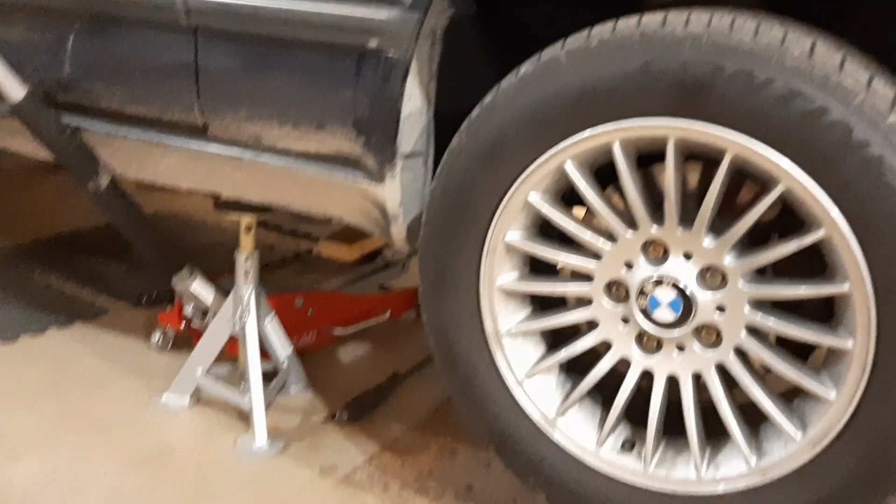I want to tackle the drive shaft because when I drive the car, I noticed if I'm just driving around and then I let go of the gas pedal, I hear a big thumping sound around the drive shaft tunnel area here. I suspect the drive shaft center bearing because it's old, like everything else, and there's a rubber

bushing inside of it. I really hope it's not the actual joints of the drive shaft because in case you don't know, the joints are staked on the E32 and also E34 and maybe other BMWs, and they can't be replaced. So you have to change the whole drive shaft, and it's $1,400 Canadian for a new drive shaft. So yeah, really expensive. If I need to work on it, I might get it rebuilt. I'll see, but we'll cross that bridge when we get there, as they say.

So yeah, I thought might as well record it. Maybe it helps others, entertains some people, laugh at my amateur mistakes. But I'm sure some of you can relate to the mistakes I make sometimes.

Anyway, so let's get under the car. I already jacked the car. I'm at the second level here with my ESCO jack stands. And yeah, I got the exhaust lowered. At the back, it's almost touching the ground.

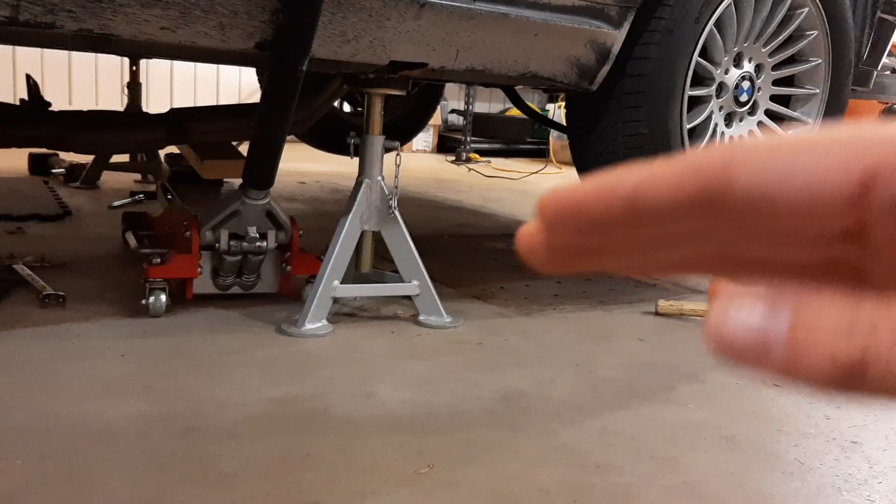And I elected to leave it in place because I can't quite get it past the subframe, I think it was, or the cross member. It's really annoying without a lift, so I'm just leaving it there, and I think I'll have enough space to do the work. So yeah, let's get under the car.

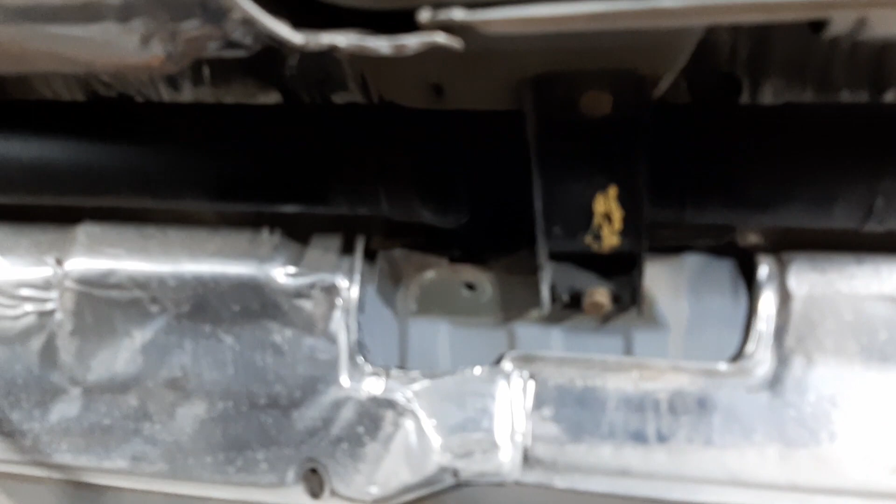All right, so I hope the video quality will be better. I decided to record everything with my phone because the camcorder is difficult to set up anyway. So this is my drive shaft. Let's just focus here. Yeah, no signs of damage or anything, but I still need to check for the clunking sound.

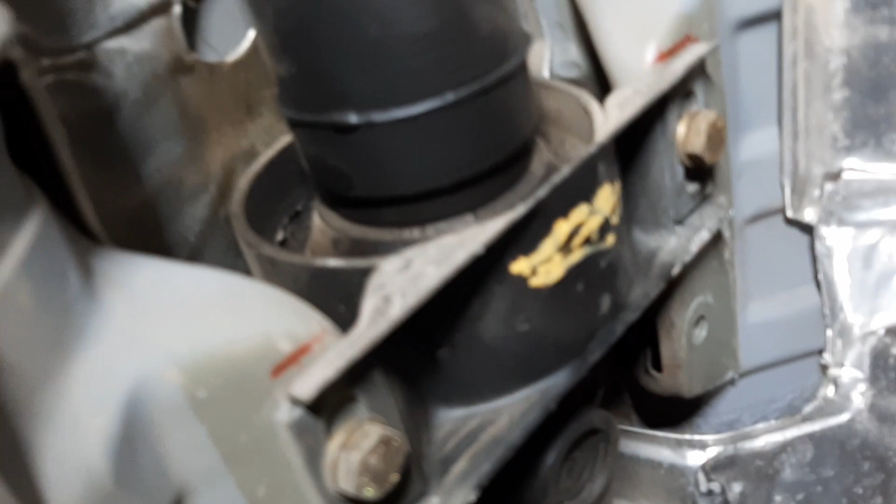So I bring my light over here and then I try to rock it a bit with my hand. Yeah, that's the kind of clicking sound I was hearing in the car, but louder. I wonder if changing the engine mounts and the transmission mounts made this bushing wear, because now at the front it's aligned correctly, but at the back here it's still drooping a bit, so that might accelerate the wear, and I think it's already pretty worn, and I don't think I should be able to move it that much.

Okay. But yeah, this clicking noise, I should not hear that. Maybe it's the shield here, but I don't think so. Okay, so I guess there's only one way to find out. I need to remove the drive shaft and inspect all the joints and the center bearing as well. So yeah, let's do that.

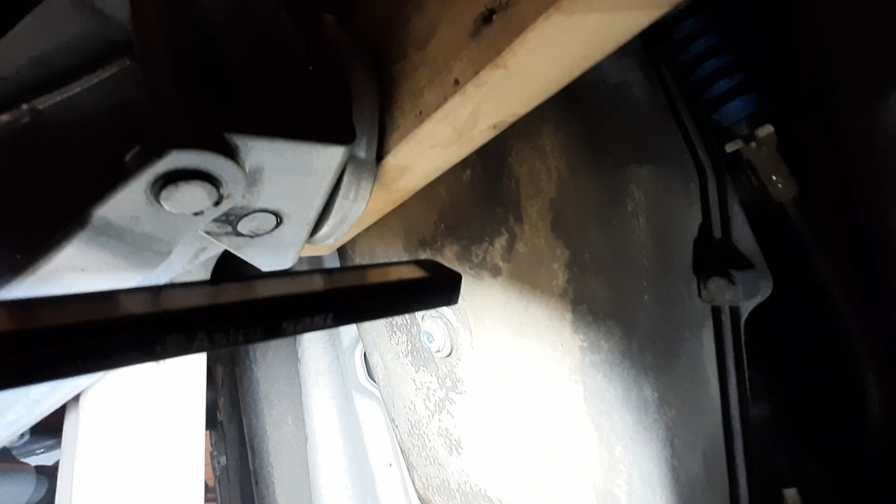The Bentley manual mentions a sleeve here that I need to unscrew, but I can't see a sleeve anywhere. Maybe it's for the manual transmission cars. I guess I'll just go to the next step then. Okay, so the transmission is supported, and I need to remove these 13mm bolts and nuts. Now, of course, I'm using my trusty Milwaukee impact. So easy when you have the right tools, eh? Yeah.

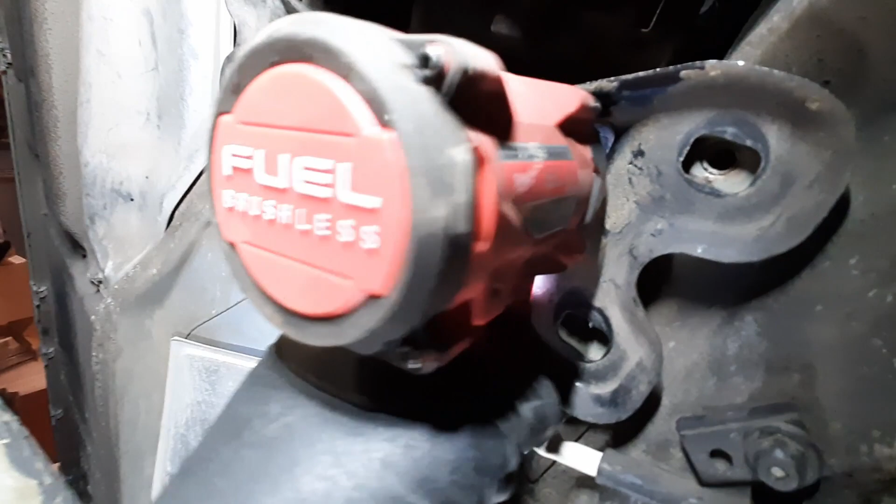All right. So it should drop right out. Yeah, there's a bit of tension here because the studs are not all aligned perfectly. So yeah, now I have full access.

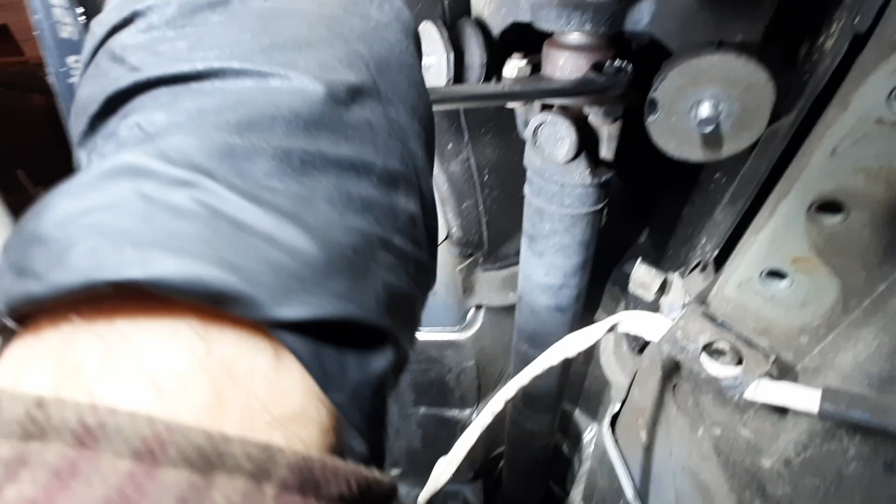Perfect. Okay, so I put the car in park with the parking brake activated, so the drive shaft shouldn't move all that much. So apparently these are very, very tight. Wow, it's tight. Yeah, very tight. I think I'll use a cheater bar for that. Okay, so my cheater bar is just too small to fit on my 17mm, so I'll just go with the good old dead blow hammer and see how it goes.

I think I got it. All right. Perfect. Yeah, these are self-locking nuts. You need to replace them. You can't reuse them.

And yes, I need to get ratcheting wrenches. They're on the list. But I want to get a set from Gray Tools in Canada, and they are close to $300 for a set. So I need to budget accordingly and buy them in the future, not now.

Okay, need to get the car out of park and parking brake. Okay, where's the other nut? There it is. All right, so that's all 4 nuts removed.

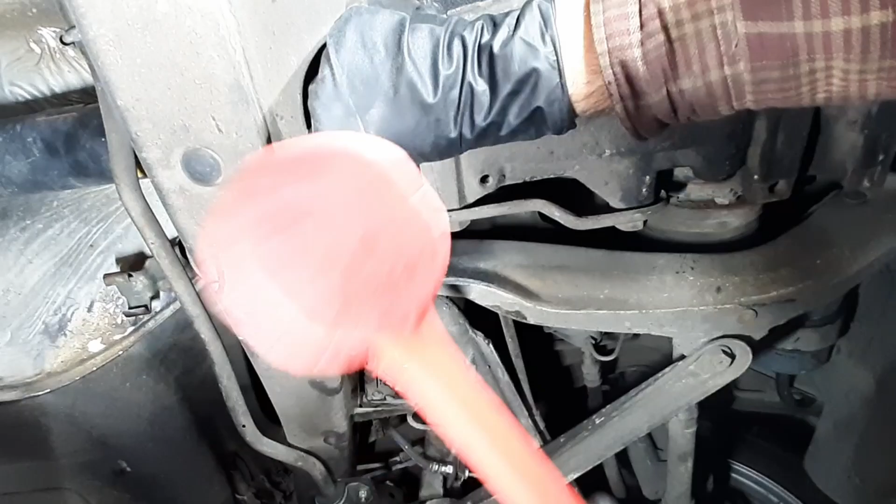So you can tell these are locking nuts because they are deformed and they don't back out easily. They offer quite a lot of resistance because of the shape of the nut and how it fights against the threads. Okay, I need to rotate the drive shaft now. Alright, so that's all the nuts at the diff removed.

Okay, now that the front and back bolts of the drive shaft are removed, I can remove the center support bearing, which is just held with these two 13mm bolts. Okay, I'm not sure how heavy the drive shaft is. The Bentley manual says to support it. I don't have any device to support it, so I'll have to manage to do it on my own.

All right, that's the last bolt. Okay, so yeah, it's somewhat heavy, but not too bad. That doesn't sound very good. Anyway, now I guess I need to find a way to undo it. This part is rarely shown in videos because I guess it's too cumbersome to record because of how long and heavy it is. Well, okay. I guess I'll just get some blocks of wood and support it.

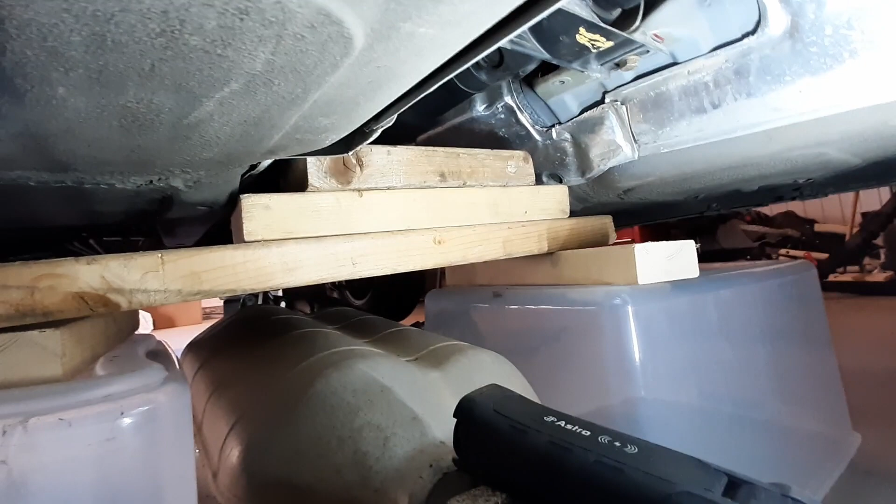All right, so I built myself a fantastic custom drive shaft support tool using quality plastic and fine wood, and it's fully adjustable too. You can slide it back and forth and so on. Very quality tool, and made in the USA, of course.

But anyway, that'll do. I just need something to support it, because I don't want to leave it hanging there, and I'm not quite sure how heavy it is yet. So yeah, I'll just hold it on these blocks, and then I can work at the flanges. All right, good stuff. I got the drive shaft lower a bit. Let's see if I can move it. Okay, so it looks like the bolts are binding slightly. Okay, yeah, nice. It's free.

Okay, how do I get it through there? Maybe I need to move it out of the way like this. All right. Okay, so you just need to pivot the joint either like this or the other way, just to get it past the flange here, this one. Okay, so that's good. This side is free. I can just leave it resting here like this.

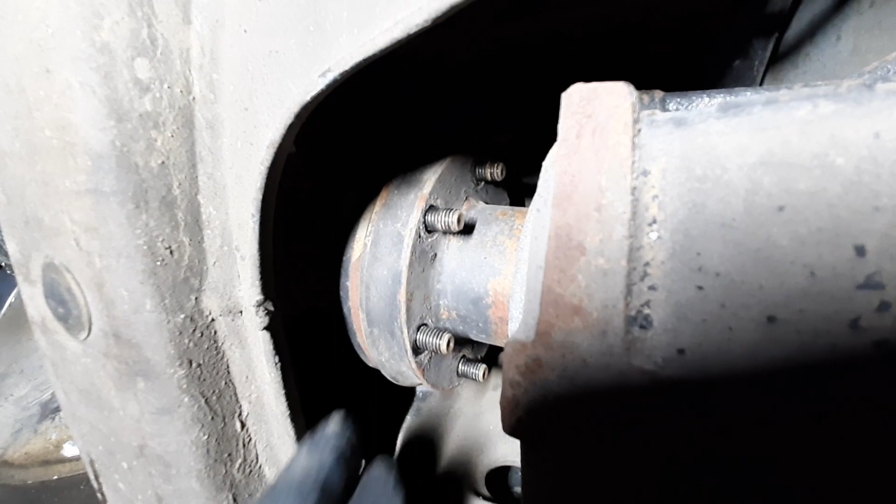Okay, I'm on the diff side, and I'll see if I can remove the drive shaft and leave it resting on the subframe here. So let's see how it goes. Oh, it slides really easily. Okay, I want to be gentle with it, and then just leave it resting here. All right, perfect. Okay, I guess I can remove my support now and then get the drive shaft out under the car.

Okay, I tried to give you a wide angle view. It's difficult to capture the entire length of the drive shaft. Anyway, so I can remove these blocks. Okay, and I'll try to pull it at the back. Slide it over the sway bar, like so. All right, so this is, oops. No worries, it just fell on the plastic box. Oh, yeah, it's pretty heavy. Okay.

All right. There you go. Drive shaft out of the car. Not the most graceful thing ever, but you know, working on the cold winter floor and getting a drive shaft out is never going to be fun nor graceful, but anyway, I still got the job done, so that's what counts. So here's the drive shaft out of the car.

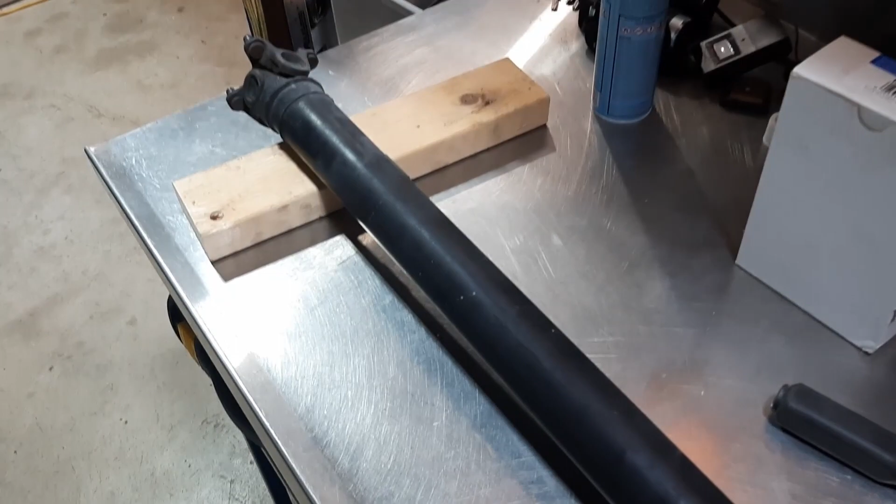I noticed that it says E32 on it there on the label, so it must be specific to the E32, so not interchangeable with the E34. And I also did a visual inspection, and from what I can see, all the little welded weights are all in place. There's one here, another one there. So you just want to make sure that they're all at the right place.

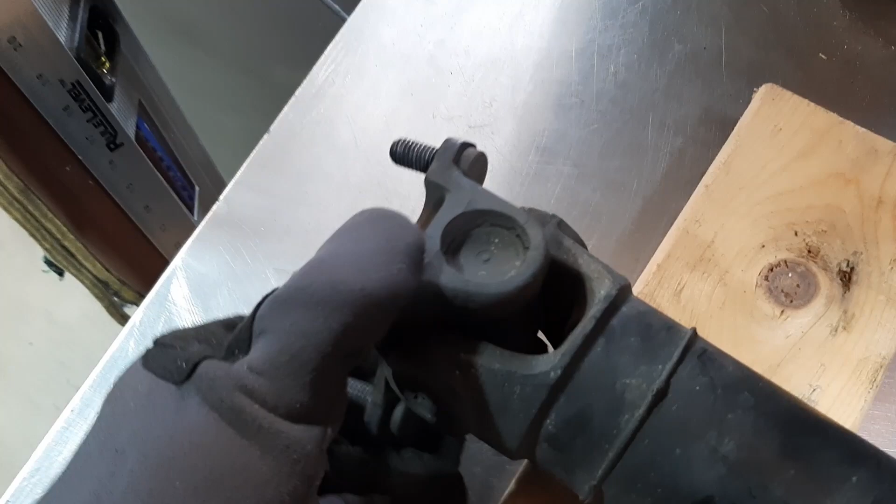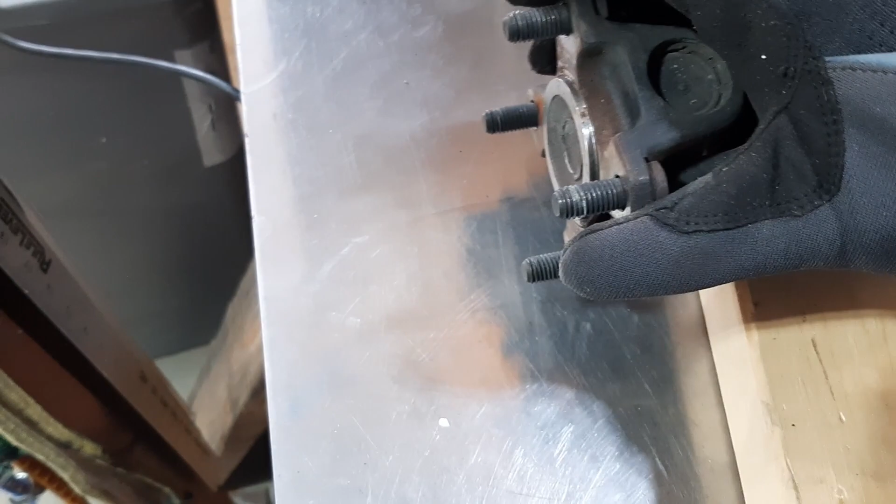I looked at the joints, and this one at the front of the car in particular is a bit notchy in all directions. So if I move it, yeah, it's a bit notchy in this direction and also this one. Hard to tell by video, but you can feel it in all directions. And I checked with the guys over at BMW Forums, and one member suggested that it's normal wear if it's in all directions. So nothing to worry about. I think it's just the age of the car.

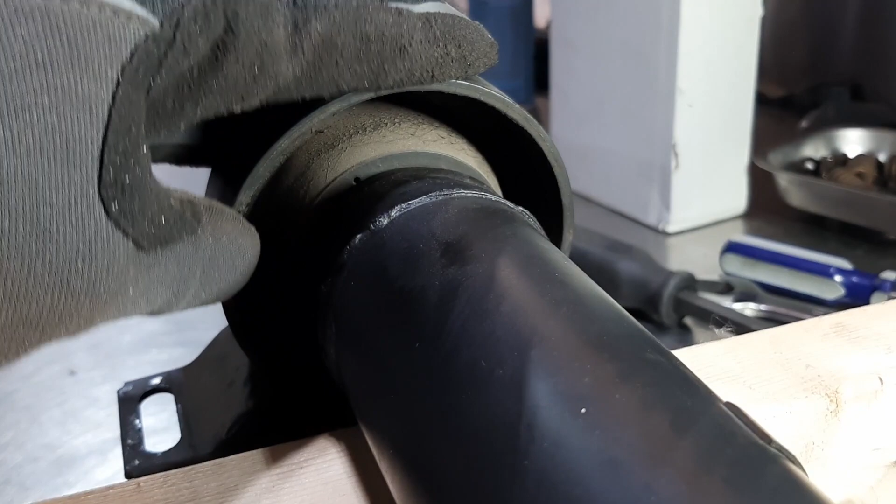And I did look, however, at the center bearing, and that's very interesting. So the center bearing needs to be replaced from what I can tell, because first of all, it's noisy. So the bearing is not good, and it's wobbly as well. So if I look at it from this view, you can see how it moves. It's eccentric. So that's no good. It means it will affect the balance, I believe, of the drive shafts. So that may be where my vibrations are coming from.

And yeah, it's noisy, and that's not normal. It shouldn't do that. And it's a bit loose. It's not broken entirely, but you can see the cracks there in the rubber. So it's definitely due for a replacement, and it's exactly what I have here. So I ordered an SKF replacement. Unfortunately, made in China, as you can see there. But you can't really control that.

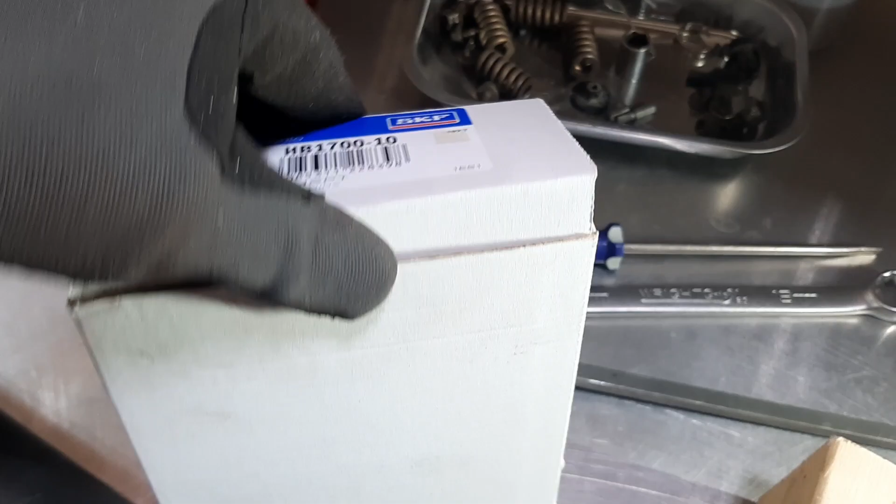So this is a new center bearing, and it's incredibly smooth when you just turn it. It's super tight and very smooth, and the rubber is nice and fresh, and it's a bit pliable, so exactly what you want, but not too much. So I think it will be a great replacement. And I wonder what these white marks are.

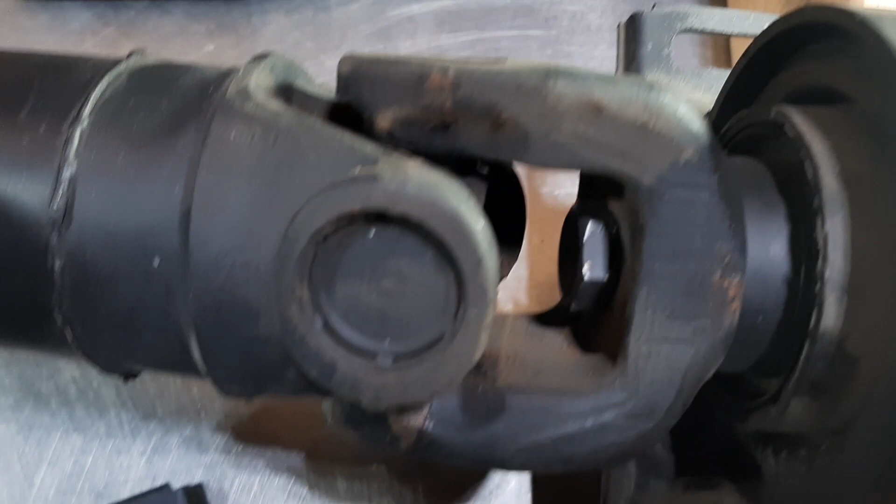Anyway, I just need to remove, I believe, this, where is it? Yeah, there's a bolt there. It's a 19 millimeter. So you remove that, and then you can separate the two halves of the drive shaft, and then you can remove the center bearing. And also, this joint is okay. I took a look, and it moves freely in all directions. So this one really did not see a lot of movement in its life, because it's very smooth in all directions.

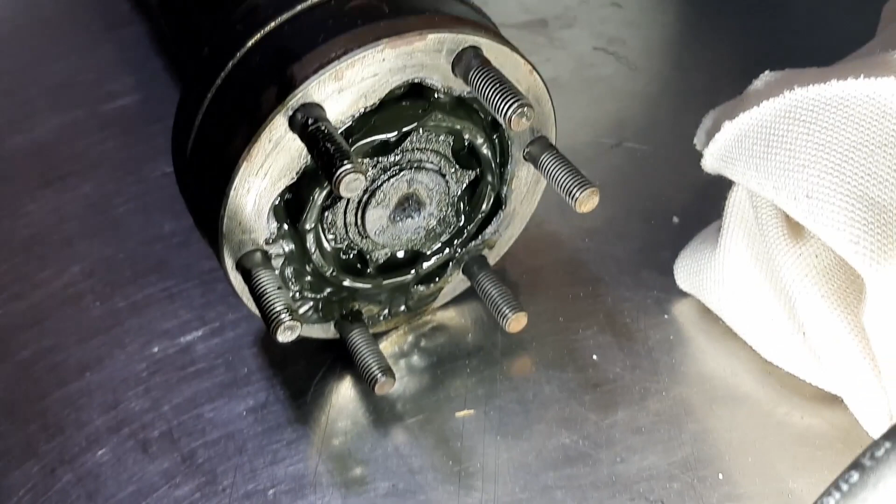And at the back there, let me just show you quickly. So you have grease there. There's a sort of bearing, and it was just packed with grease where it meets the differential. So that looks okay, I guess. I don't know what else to say. Seems fine. So I'll take these apart and then replace the center bearing.

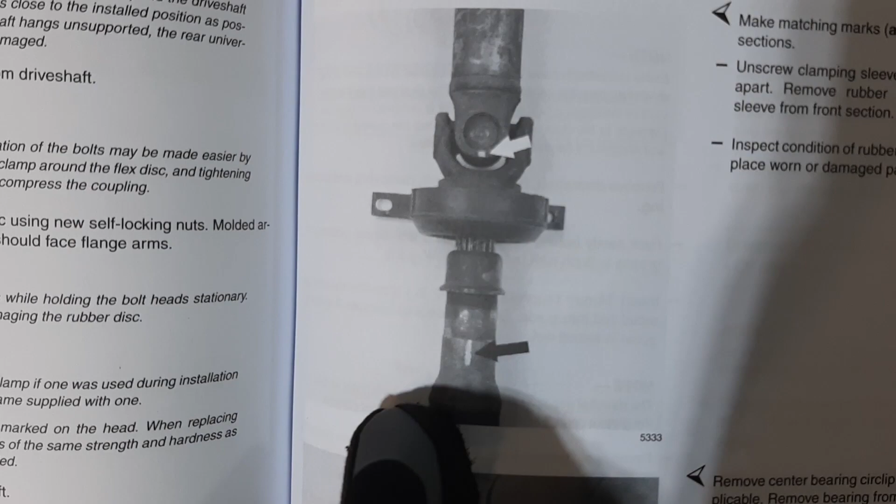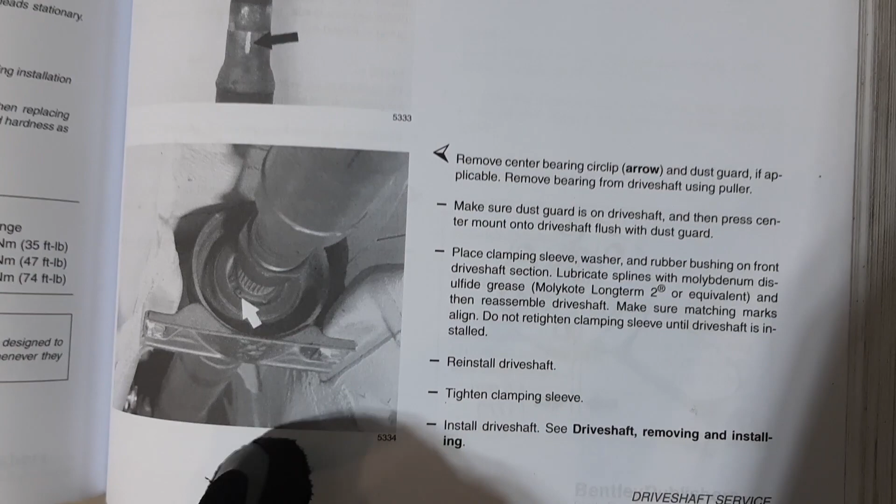Okay, so the Bentley manual says the same thing as everyone else online. You need to make paint marks so that the drive shaft is reinstalled with the correct alignment, because these two halves are balanced together. So it's really important. But the instructions are a bit unclear. It talks about a clamping sleeve, which I can't see on my car. It might be for manual transmission cars, I don't know. Then it says reinstall drive shaft, tighten clamping sleeve, install drive shaft. But isn't that the same thing as reinstall drive shaft? So what's going on here? Anyway, I think I'll just wing it, and let's see how it goes.

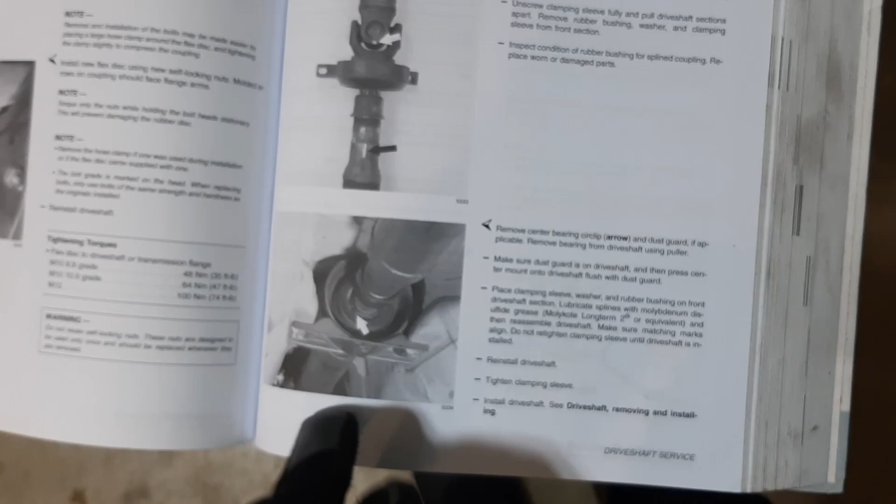So I made my paint mark using one of these Sharpie paint pens. Quite useful. Although you have to shake it really well when you're working in a 5 degree Celsius environment. But anyway, now I need to remove this bolt. I don't want it to turn, so I'll just counter hold it with a screwdriver. I think that should work.

Sorry for the shaky camera and the bad angle. I don't have a camera guy yet. Maybe when I reach 1 million subscribers, I'll take care of that.

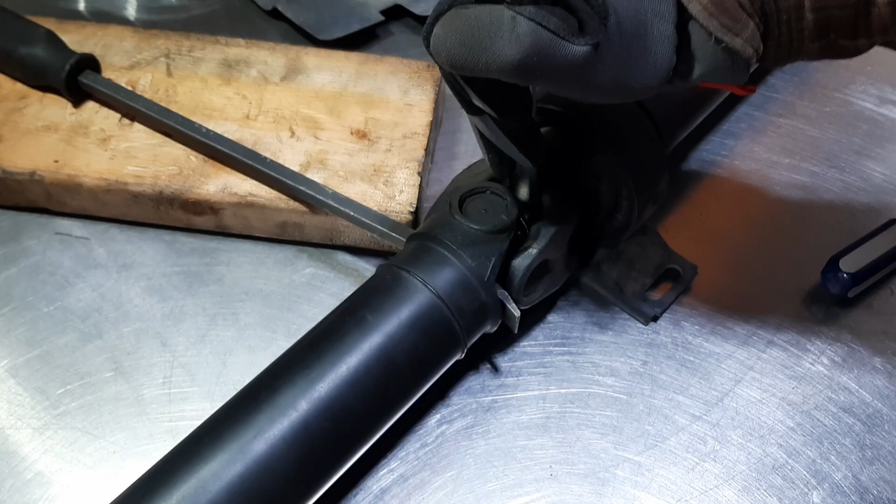Okay, and I don't think the bolt is reverse thread. I think it's a regular threaded bolt. So apparently these are quite tight. So let's see how it goes. Whoa, yeah, pretty tight. Okay, so I put a pry bar to hold the drive shaft in place, and I'll try to hit it with my hammer, because this bolt is really difficult to remove. So let's see how that goes. Wonder if that did it. Nope, still tight.

Wow, this thing is super tight. I cannot believe how difficult it is to remove it. Yeah, might have to find a different plan. So I'll try something else. If I bring it here and step on it, should be able to undo it, technically.

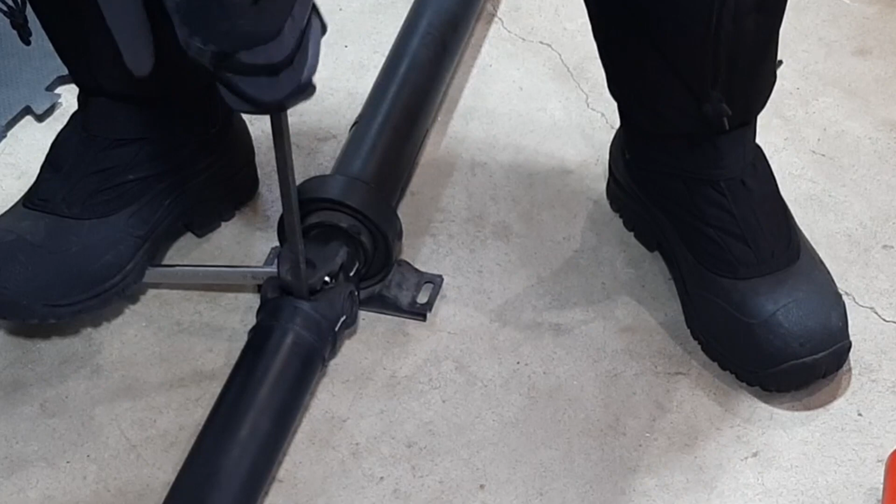Yeah, I believe that's the tightest bolt I've encountered on the car so far in my 3 years of ownership. Nothing compares to that one. So here's the result after hitting it a few times so far. It's barely backed out, and yeah, it's on there really tight.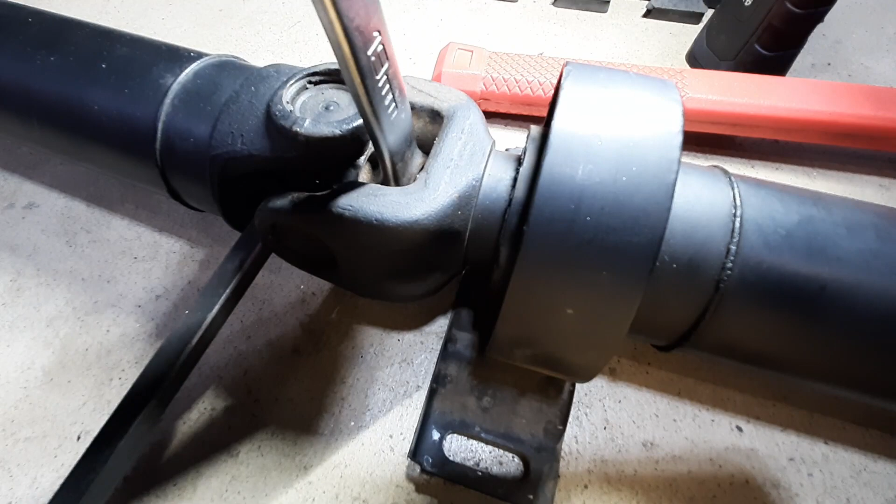Okay, I'm making good progress, except that now I don't have any room to remove my wrench if I continue, because the space at the back here is closing more and more. So I need to back out this part of the drive shaft this way, so that it rests against the bottom of the head of the bolt, and then it will give me more room at the back there for my wrench, and I can continue. Okay, let's try to back out the drive shaft a bit.

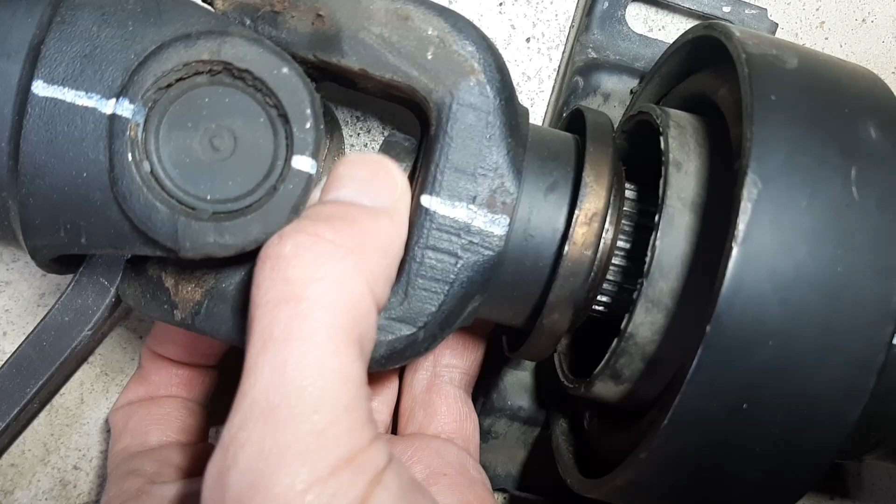Yeah, I think it's working. I'm closer to the bolt now. Okay, so it's coming along nicely. I did a few cycles of just turning the bolt, hitting it there, turning again, hitting it, so maybe like 3 times, 4 times, and it's starting to separate the splines now, and the bolt is quite loose, so I can finish it by hand. Yeah, perfect. So let me try to grab my hammer here for some live drive shaft separation.

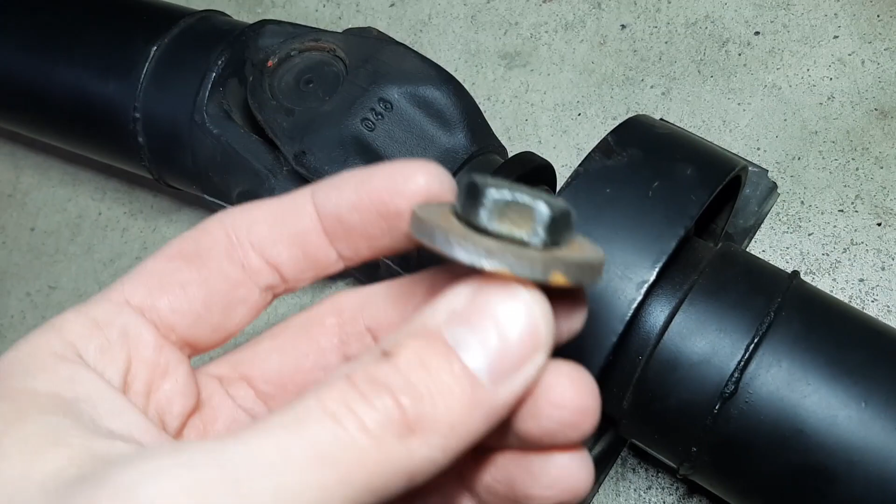Oh, there's the bolt. Finally, this is the one. So maybe they put some extreme Loctite on it from the factory, and there's a super mega washer. Wow, that's huge. It's an 8.8 bolt. There you go. Perfect. I wonder what this powder is. Is it metal shavings? I'm not sure. No, it looks just like dust or something.

Anyway, I don't see the sleeve that the Bentley manual was talking about. That metal part there is the inner race of the bearing, but there's no sleeve. So I'm not sure what they were talking about. All right, so by looking at the center bearing up close, you can see how worn the rubber is over here. It's crumbling when I rub it. So yeah, I'm glad to change it.

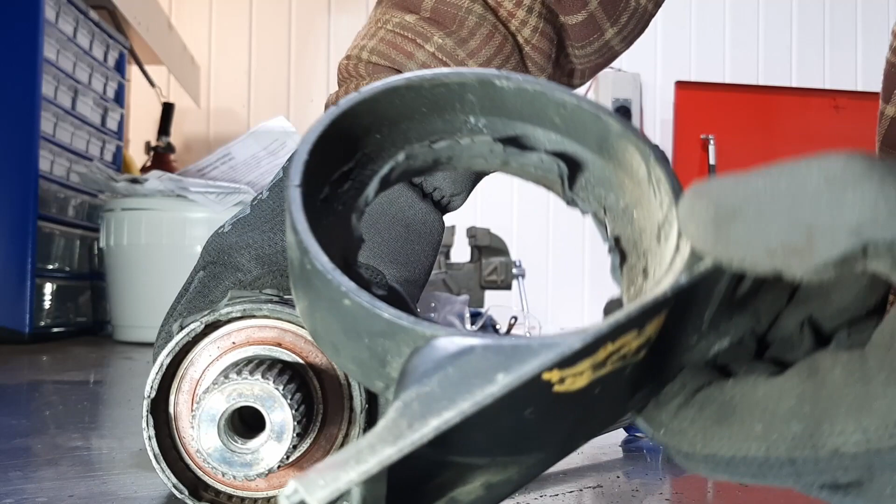I think I will cut the rubber all around to remove this outer sleeve, and then I can use a puller to remove the actual race of the bearing. So let's try that and see how it goes. All right, so this is the outer sleeve with the molded rubber, and I just cut around it, and I could remove it easily. Okay, then I just need to remove the actual bearing.

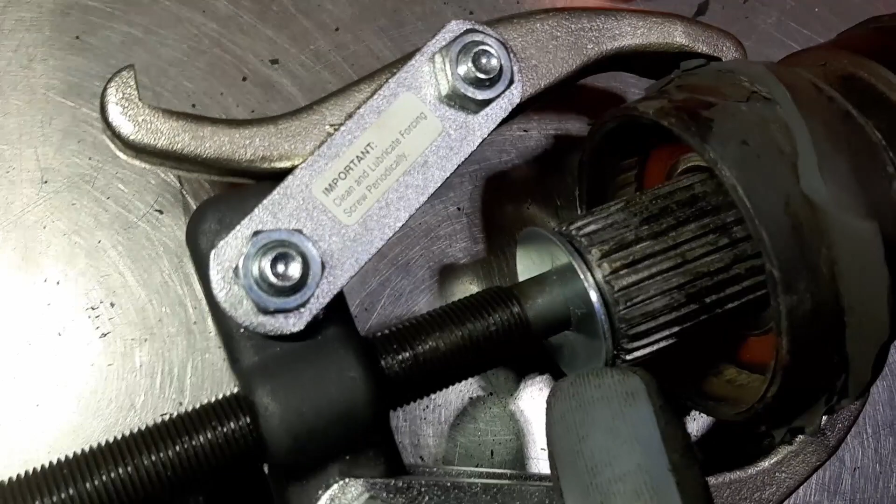Okay, so I'm using a small general purpose puller to remove the bearing. I figured that I would need such a tool because it's probably stuck there. I'm using 2 washers here to push on the splines, and then it should pull the bearing. And I already tried it, and I can see that it's separating. You just need to make sure that you are grabbing far enough on the rubber so it doesn't slip.

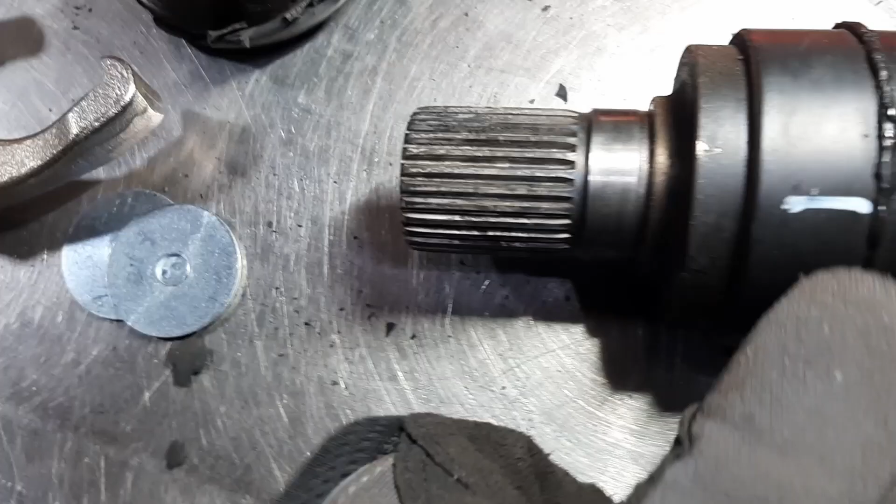Okay, so let's see. Okay, perfect. So that's the bearing removed. Okay, so this is the surface where the bearing sits. Looks nice. And the splines are in good condition as well.

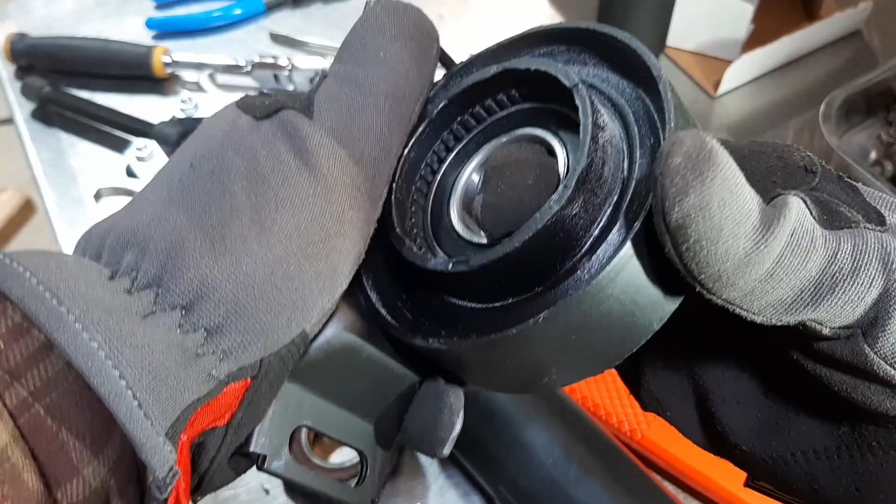So okay, good stuff. I inspected the bearing, and it's pretty smooth when I turn it, except that I can hear some clicking when I push on it. So yeah, if I try it with the new center bearing, it's perfectly solid and there's no movement and no play at all.

So when looking inside the threads here, I can see some residue. I'm not sure what it is. Maybe some old Loctite that BMW used in the 90s. I will use this bore cleaning extension on my drill to clean inside there, you know, just to make it nice and so there's no debris or anything like that.

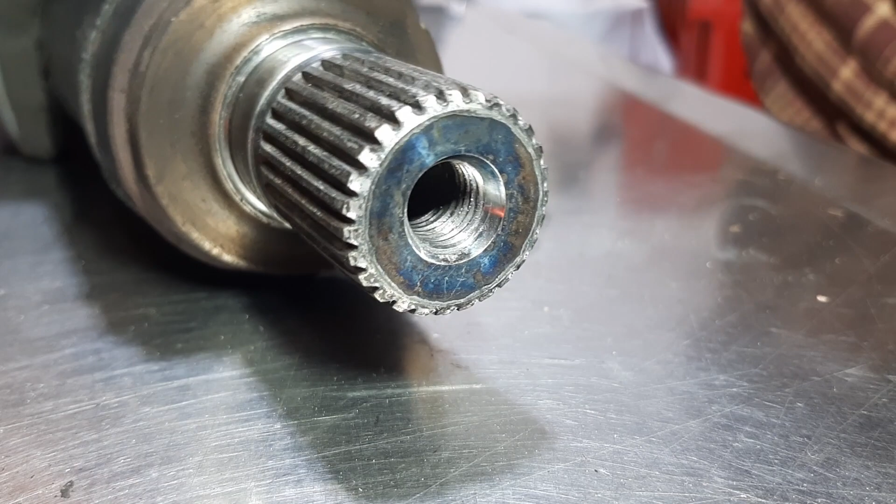All right. Okay, give it a bit of brake cleaner. And just clean it with a towel. It's probably overkill, but while I'm in there, I might as well make it clean so I know it's okay and there won't be any obstruction for the bolt. So yeah, okay, that's great. Looking nice and shiny. Ready to reinstall.

Okay, now for installing the center bearing. So the way it goes is that there's a deeper side here, and there's a shallow, almost flush side, and the flush side goes this way towards the drive shaft.

So when reinstalling bearings, normally from what I've seen on videos online and reading about it, you would use a cup of some kind to push on the inner race. So this is the metal part, and you don't want to push on the outside here or on the rubber or on the actual mount, you know, the outside casing. So you want to push on this, but the thing is, I don't have a suitable socket.

I have a 1-inch socket here, which kind of fits, but it won't slide over the spline, so that's no good. And I have a 36 millimeters here that would slide okay, but it doesn't really make a good contact with the inner race, you know, so that's not good.

But then I looked at the drive shaft. So this is the second half that pushes against the center bearing, and here, let me show you. Okay, so if we look at the shaft that would actually contact the bearing, you can see that if I slide it on there, the diameter is perfect.

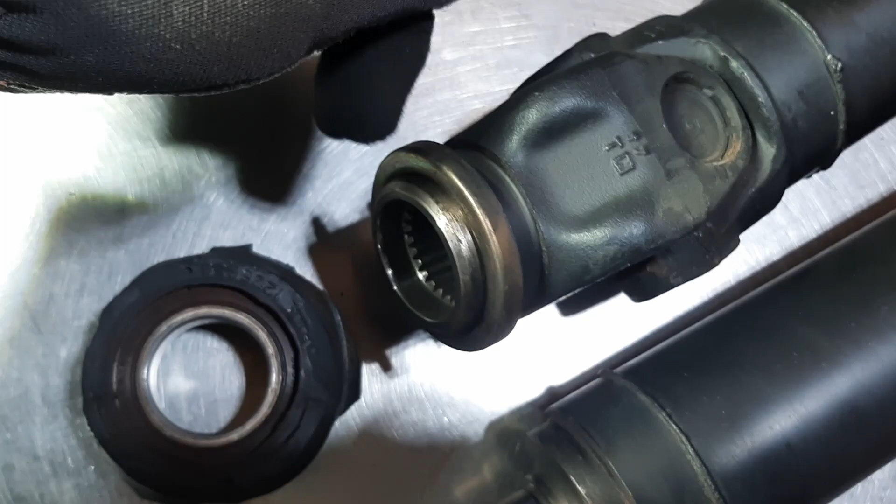Okay, so my theory is that I can actually use just this sort of surface area to push the bearing in place, and I don't need a cup or any special installation tool. I will just use the bolt to push it this way, to clamp it, and it should seat the bearing perfectly, just like this. So I will try that, and let's see how it goes.

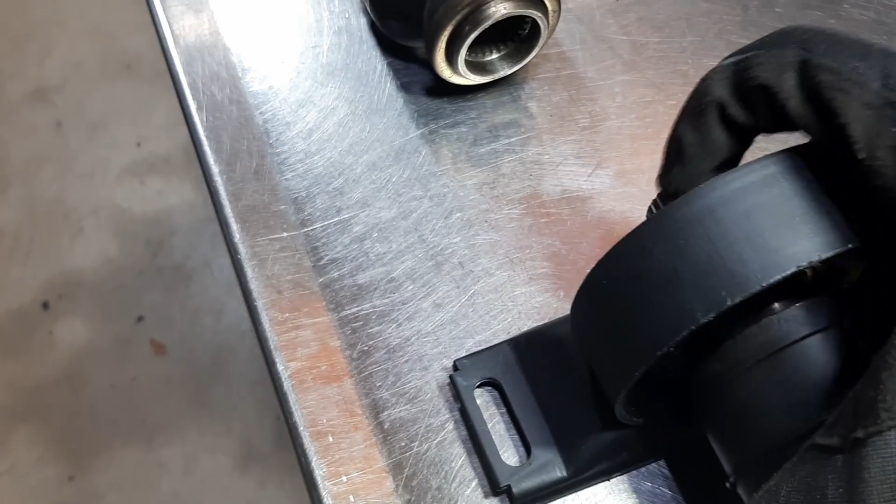Okay, so let's go ahead and install the new center bearing. I will just slide the drive shaft inside here. This is kind of hard to work with one hand only. Okay, so wow, it slid really easily. That's good. Okay, so now I think I will put a block of wood here just to prop it. All right, good old blocks of wood, what would I do without them. So I can align the mark here and then align it like so.

Sorry for the noise, by the way. It's really windy outside tonight.

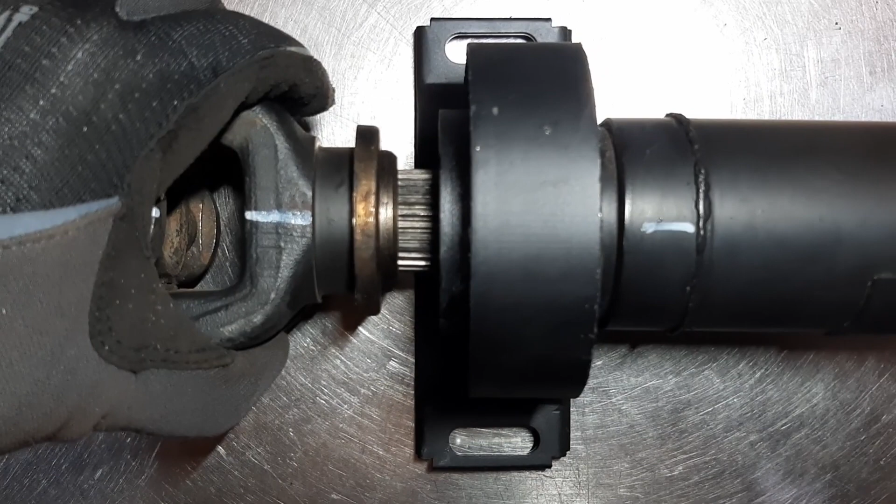Like so. Wow, it's really easy to install even with one hand. Quite simple. Okay, now I'll grab my bolt and try to feed it somehow. Okay, maybe I need to turn it like this. Need to be careful so that the drive shaft doesn't fall off the table, of course. Okay, I have a habit of dropping things when working on my car, so need to watch for that.

Okay, so the trickiest bit is just to get the first threads started, and then you can screw it just with two fingers, and it goes on real easily. So yeah, it's a good idea to clean the threads of the bolt, also the inner bore of the drive shaft here, because you'll be working just with your fingertips at first, trying to screw on the bolt. So yeah, it's nice to make it easy on yourself and get everything clean.

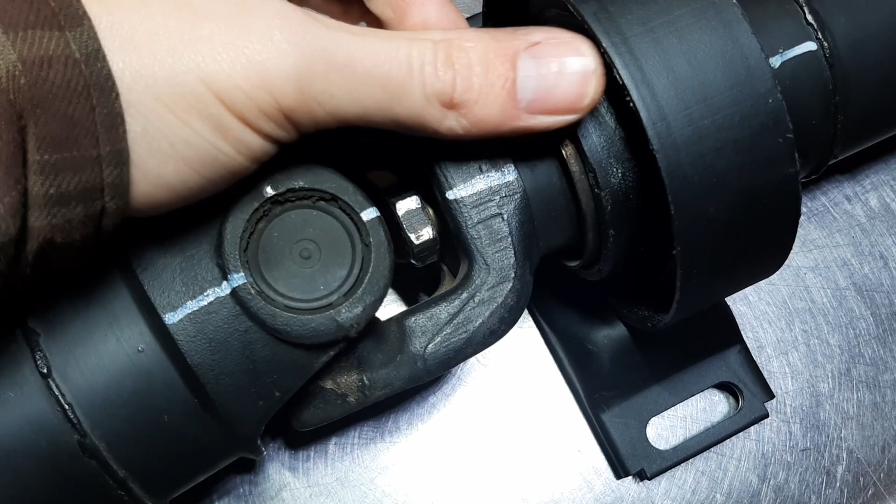Okay, so now that the bolt is started, I can push the drive shaft this way so I can get clearance, and I can use my wrench now. Okay, let's see if my wrench will fit. Oh yeah, plenty of room. Okay, so now it's just a matter of tightening the bolt.

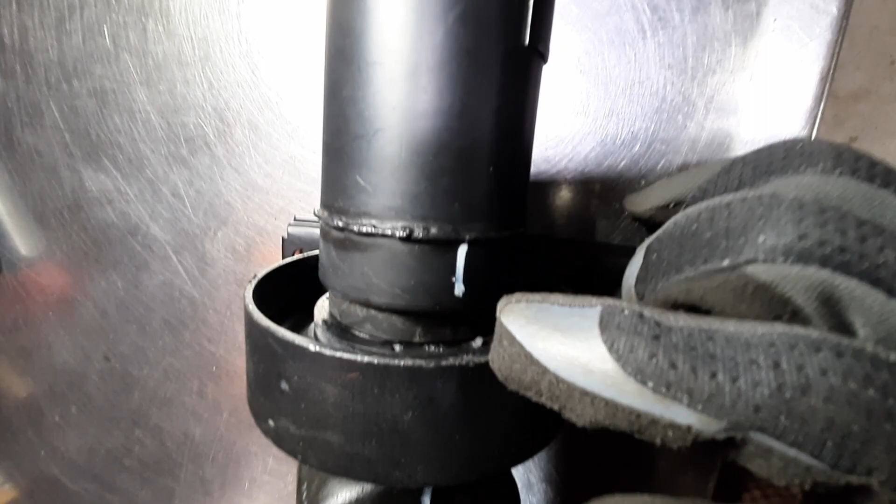Okay, now I'm at a point where I can't really hold the drive shaft just with my hand. I'll need to put a pry bar to tighten the bolt further. Before tightening the bolt all the way, I need to verify if the bearing is aligned correctly. And so if I turn the drive shaft, yeah, I can see that it's perfectly aligned, and the gap around the drive shaft and the bearing is the same and consistent all around. So it looks to be aligned correctly.

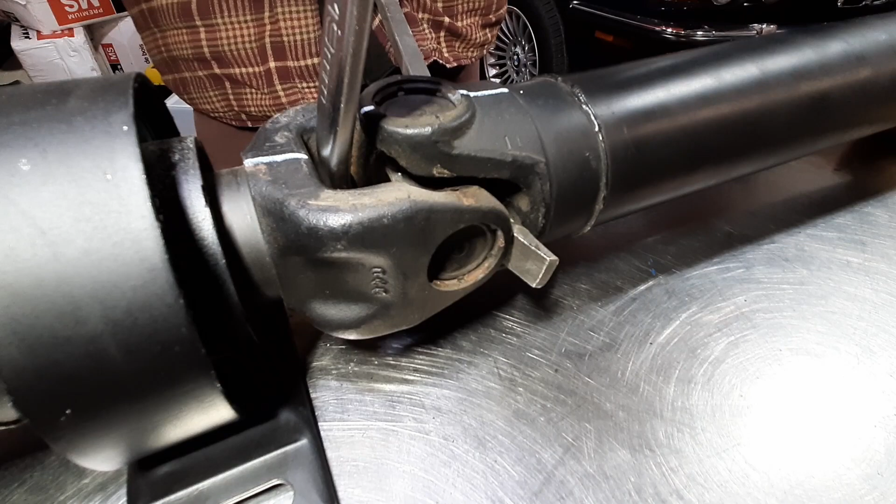I could not find a torque spec for this bolt, so I will just make it very, very tight. Just how I found it. Okay, that should be plenty tight. Okay, final visual inspection. So the large washer appears to be flush there. That's good. And over here seems to be okay. And at the back, there's just the slightest gap there between the drive shaft and the rubber. But I think that's okay.

Okay, let's see if all this work paid off. If I try to rotate it. Perfectly smooth. No noise. No wobbliness. So if you remember, we looked at it and it used to wobble. Yeah, nice. That's perfect. Can't wait to try it on the car. So, okay, let's put back the drive shaft.

And by the way, I decided not to put any Loctite there because the Bentley manual doesn't say to use any. So I just left it alone. I just made this bolt super, super tight using, you know, all the strength I have. Yeah, no Loctite or nothing, just dry as it is.

I don't know if you noticed, but there used to be a kink there, so I must have made a kink in the metal lip while hitting the drive shaft to get it apart, and thankfully I could straighten it just by using a large screwdriver and pushing up. So this lip is really, really thin, so you can get it in the right shape easily.

So I'm at the differential at the back, and I was figuring out how to reinstall the drive shaft in the right order, you know, the front or the back. And while I was test fitting it, this sort of gasket fell on the ground. So yeah, I think it goes like this, or in a similar fashion. I need to align it better. But yeah, if you are working on your drive shaft and reinstalling it, make sure this gasket doesn't fall, and it's properly installed when you install your drive shaft, because it's there for a reason.

Okay, change of plan. The gasket just ends up moving too much when reinstalling the drive shaft. So since it's coated in sort of grease, it sticks to the surface quite well. So I just installed it on the flange there, directly on the drive shaft. Okay, so here's the drive shaft all installed, ready to go. Thanks for watching. No, just kidding.

So I did not record the reinstallation process because it's just too long of an item. Very bulky and difficult to record and maneuver. So yeah, I just put it on the floor here next to the exhaust and grabbed it, you know, with my two hands and just lifted it in the air. And then I could rest it on the rear subframe over here, where I show it. So there's a bit of a resting spot here.

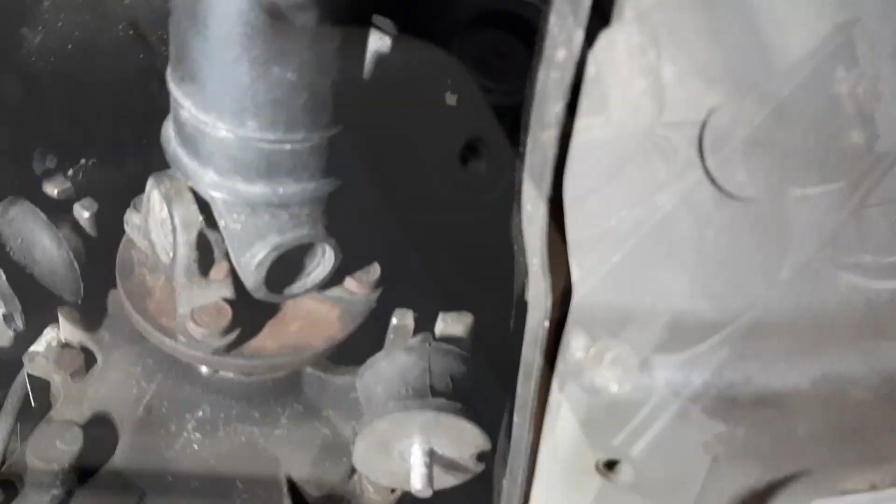So you put it there, and then I had to make sure that the 4 bolts here of the U-joint aligned properly with the holes on the flange of the transmission, because this doesn't rotate. So yeah, you have to match the holes there before you can fit it over there at the differential. So once you have a good match, you can slide it over the differential and then pivot the U-joint around so that it fits inside the holes eventually. And then you can just secure the center bearing with the 2 bolts loosely, and then it's good to go and you don't have to hold it anymore.

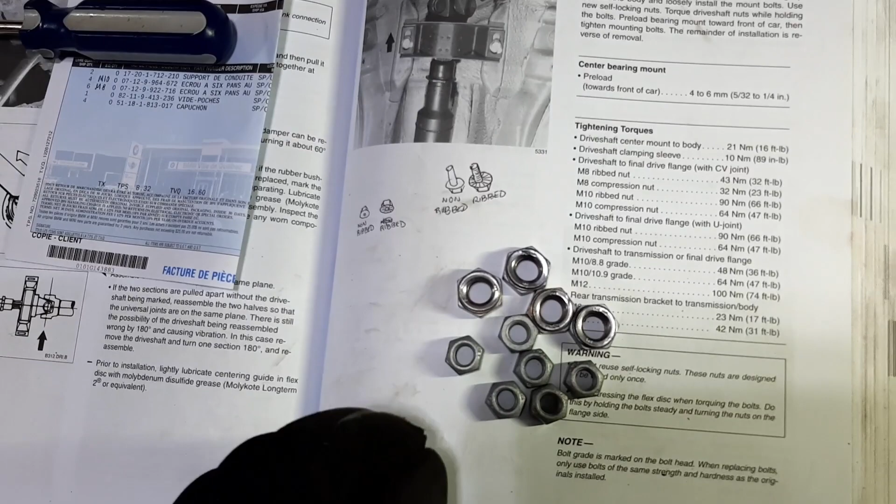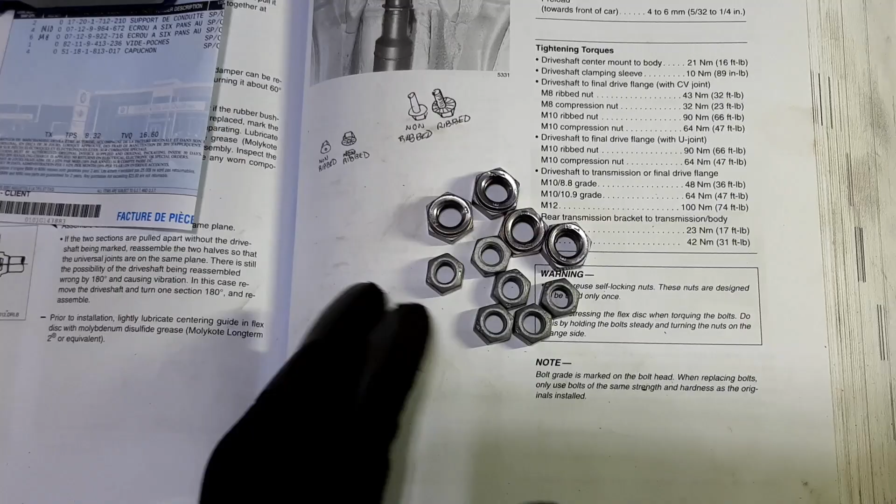For the hardware, I decided to go with all new nuts. These are self-locking nuts, and unlike the exhaust manifold that I installed, where I reused the locking nuts, but it's not really a critical area. It's not a life or death situation. Whereas the drive shaft is really important to my eye, and I just did not spare the expense and went with new hardware. And the specs had me a bit confused at first because it talks about some ribbed nuts, some compression nuts, and I had to do a bit of research. So the ribs they are talking about are on the bottom of the nut.

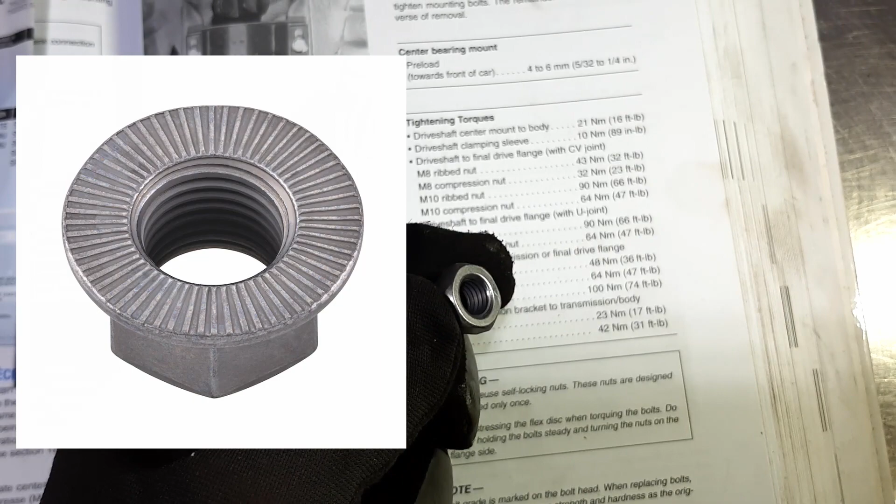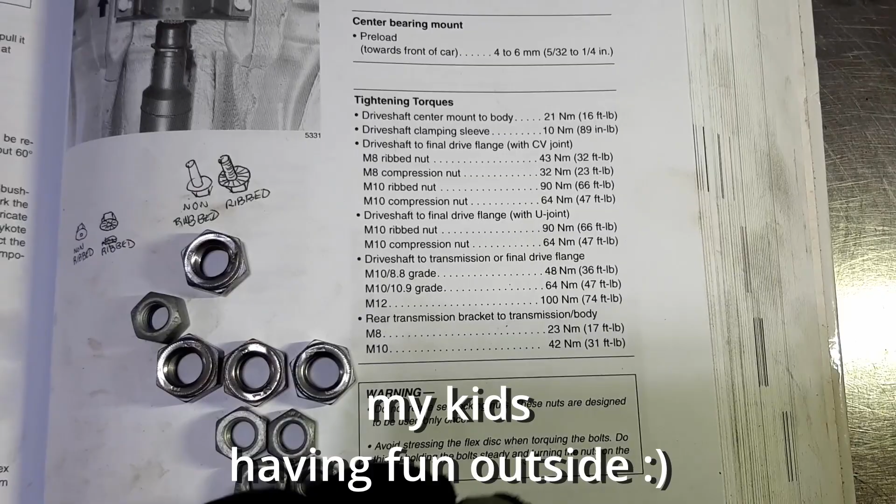There would be ribs if there were any, and there are no ribs. It's just a smooth surface. So this is just a compression nut, and same thing, they have them for bolts as well. So I will go with the compression nut. These are M10, the smaller ones are M8s, and I will go with the higher torque values just in case. I did a bit of research online, did not find a specific torque spec, but it was around the highest value, so I'll go with that.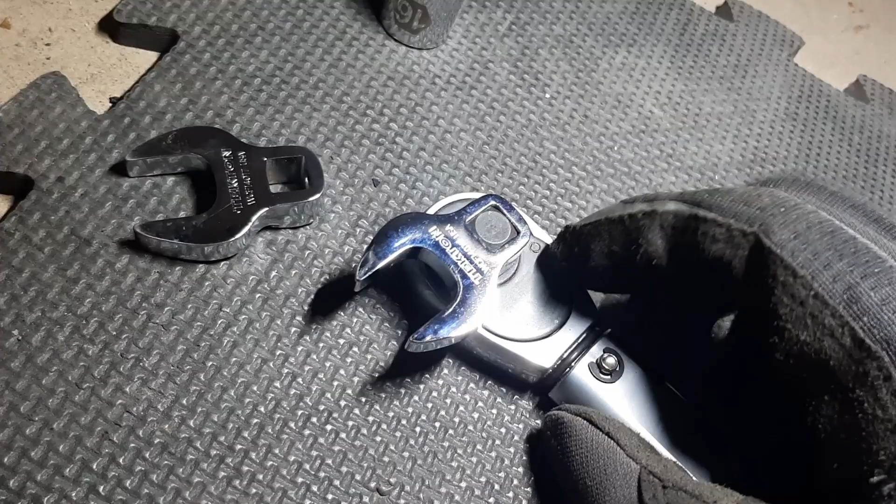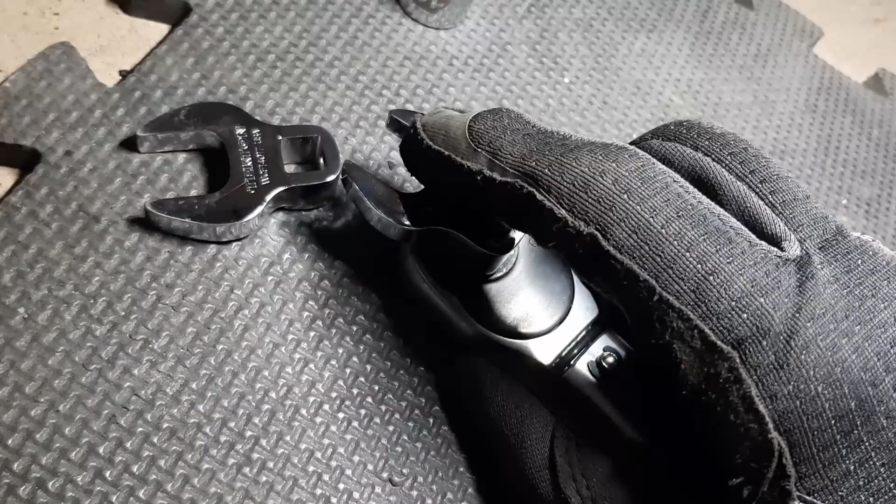One thing about these crowfoot extensions and torque wrenches, you want to use them at a 90-degree angle like this. You don't want to go past the anvil. You have to align it correctly. Otherwise, if you use it like this, you will end up applying too much torque because the length will not be correct. So you need to put it at an angle like this.

Okay, so I already torqued this nut over here, as you can see with the pen mark. By the way, my park doesn't stay engaged, so kind of weird. Not sure if that's normal, or if my detent pin is worn or whatever. You want to use the crowfoot extension all the way in to get a good grip on the sides. As you can see, I marred this side a bit because I was not deep enough. Also, you have to counter hold the drive shaft because it keeps turning on you. So yeah, it's a bit awkward, but doable.

All right. All right. Okay, so that's all 4 nuts torqued to spec. Quick note about my parking brake. It works now. It fully engages. So here's what happened.

As I was working on my drive shaft, I had to support the transmission because I had to remove this bracing here to access the nuts for the drive shaft. So the transmission was not supported. So obviously I used my floor jack and just held it in place.

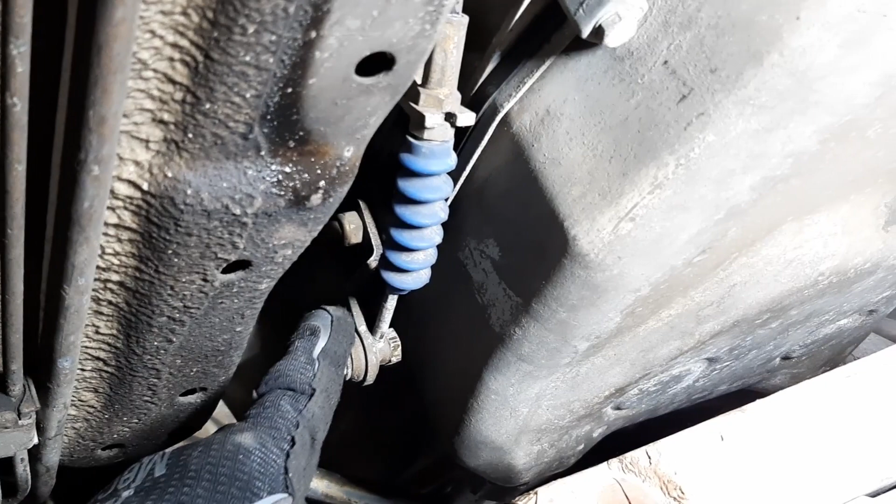All I had to do was put the car in park, and then I undid this nut while holding this bolt, and then I could move the parking lever here. Let me show you. So this lever, I could put it in park by pushing it towards the front of the car. And then I could see that the alignment of the cable changed a bit, and then I only tightened the nut again, and that was it.

So now whenever I put the car back in neutral and then in park, it fully engages the parking pawl. So probably something happened in the alignment or the cable stretched, but anyway, it's fixed now, and the drive shaft no longer turns when I put the car in park.

Okay, same thing at the back, at the differential side. I will install the nuts hand tight at first, and then I will torque them. So these are 13 millimeter M8 nuts. And again, I'm using all new nuts from BMW.

I wish I could have an account at these industrial retailers, where they buy all sorts of nuts and bolts at these obscure sizes. They have all this stuff for cheaper than BMW. So I'm sure I could get a nice discount there. But yeah, it's not open to the public. You need a business account, unfortunately. So I'm stuck ordering directly from BMW.

Okay, so that's all 6 nuts installed. All right. Okay, so that's all the nuts torqued at the differential. All good to go. And yeah, the crowfoot wrenches, they're okay, but you have to be really careful not to slip. They have a tendency to mar the corners of the nuts if you're not careful. But other than that, it's okay. Maybe the flare type extensions would be better, the ones that grip the nut. But yeah, anyway, it's all done and good to go.

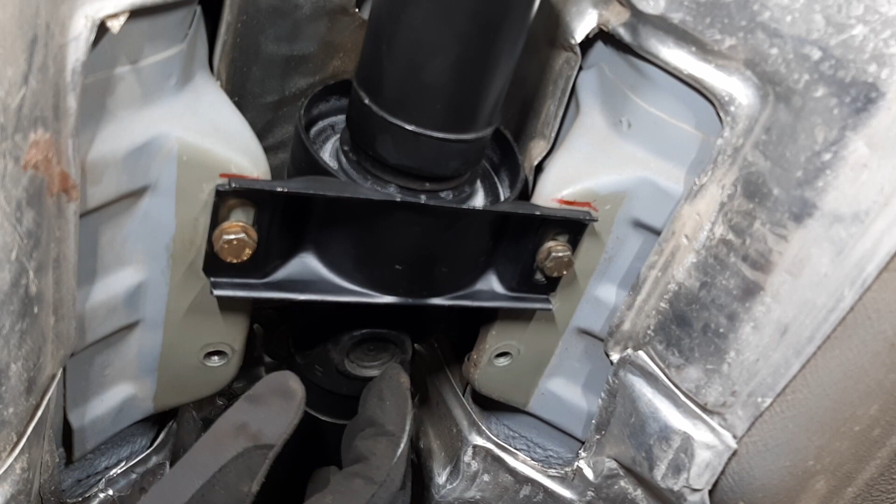Okay, so back at the center bearing, I need to tighten these 2 bolts. They are 13 millimeters, and the Bentley manual says to preload the center bearing by 4 to 6 millimeters forward towards the front of the car. It's a bit less than 1/4 of an inch. So there's some movement there, like this. I guess that's what they mean.

So okay, I'll just push it forward a bit more on this side. All right, that looks good. I think it has to be the same on both sides, ideally. Okay, I think that's sufficiently preloaded. And I need to torque these to 16 foot-pounds of torque, or about 21 Newton meters, so really not a lot of torque. There you go.

All right, so that's the center bearing preloaded and reinstalled, and the whole drive shaft installed, so that's perfect. I guess I'll go in the car, shift it to neutral and try turning it. Okay, let's see how it goes when I turn it. Oh yeah, turns great. No binding or nothing. And if I shake it, yeah, I don't hear any more rattle in the bearing itself, and I see the rubber is much stiffer, so that's great. The only clicking I hear now is at the transmission. Okay, so I think I'm good to go.

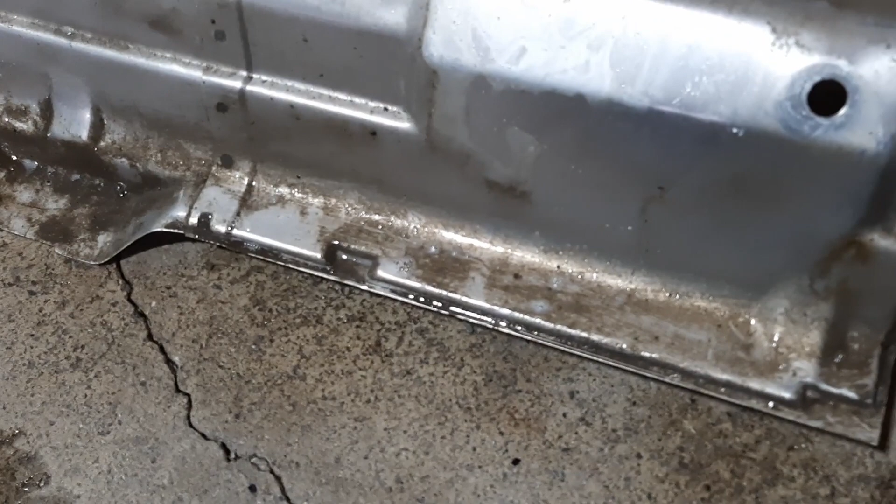Before I reinstall the exhaust, I thought I would clean up the heat shield just under the drive shaft. It's a bit dirty, and there's some, not sure what that is, some hardened grease here or something. Maybe from the old center bearing, maybe it flicked some grease. But yeah, I'm sure it will clean up nicely.

There it is after a bit of scrubbing. It's a lot cleaner, not perfect. There's a bit of a tar-like substance that's difficult to remove. I don't want to spend a lot of time on this. So yeah, it's good for me. And I don't mind if it has a patina. You know, it goes with the territory of a 30-year-old car. So yeah, good for me.

Okay, so everything is reinstalled. I did not show the process of installing the exhaust because I already showed it in the video where I changed the transmission mounts, if you want to look at that. Yeah, it went real well. There are just two clamps at the back here by the rear muffler. You got the hangers. There's also this support by the transmission. You have two bolts there, and then you have to route your O2 sensor wire. You got just some holders, so not too bad of a job.

And you have the sort of springs at the downpipe. So yeah, it went quite well, and now I guess I'm ready to lower the car and start it up to see how it goes. And I need to also check my exhaust manifolds because I changed the gaskets there, and I did not start the car since then. And actually, I haven't started the car in about 5 months, so it'll be the first startup, and I'll show it on video, and hopefully it goes according to plan.

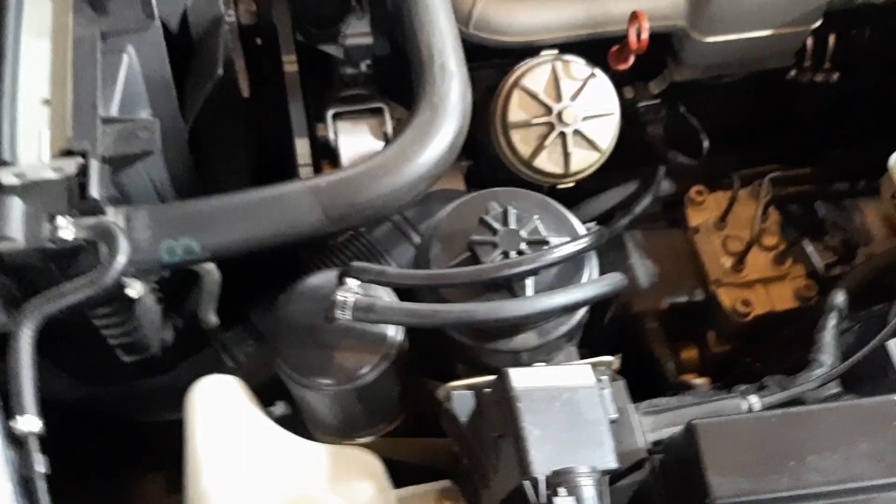So yeah, everything is connected, and I just need to remove this maintainer, this battery maintainer that I use during the winter time. It's connected to this kind of unit, Battery Tender Junior. It's really sufficient for what I need, just a slow trickle charger. So yeah, let's try it out.

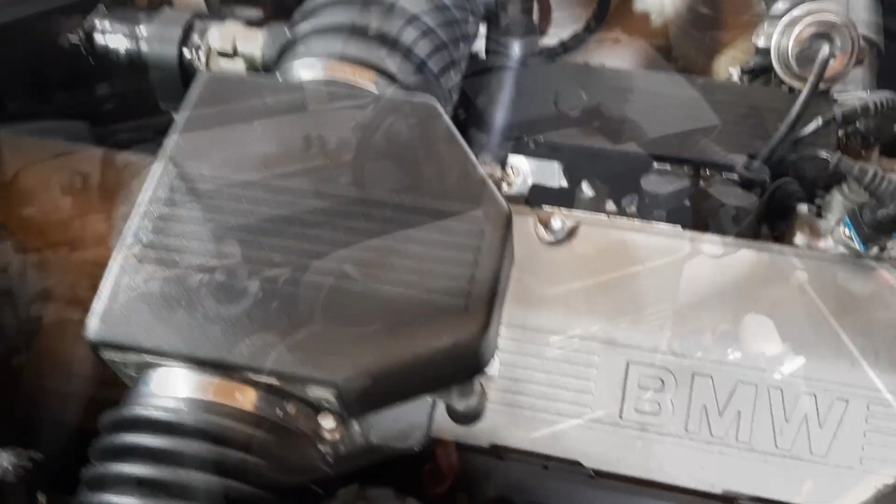Need to put the transmission in park. Okay, hopefully it starts right away and I don't have any leaks at my exhaust manifold. That would be bad. Okay. So the fan is off. Wow, that was a really nice start. No loud exhaust noises, so that's good.

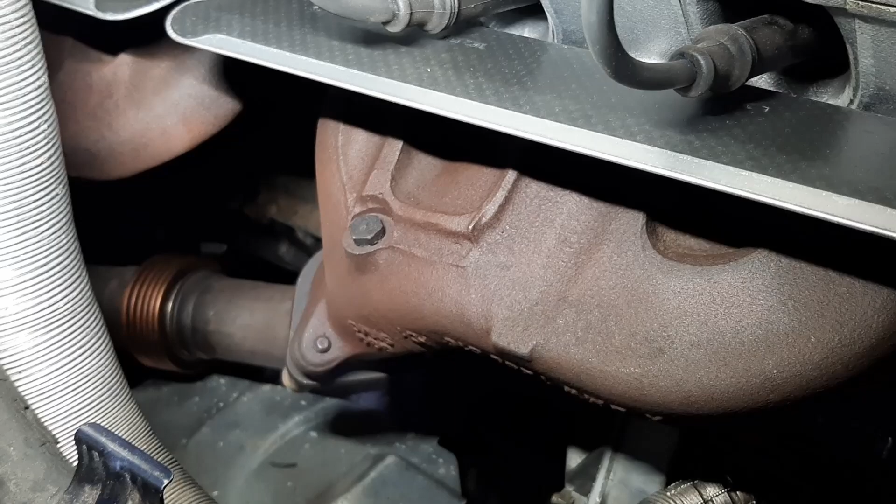Okay, there's gonna be some condensation, I guess, for all this time sitting. Yeah, lots of condensation. Oh, what's this? Uh-oh. Need to check this out. Okay, so the issue might be the penetrating oil that I used to change the exhaust manifold gaskets. It's probably burning off because I really used a lot of oil. So it could be what's causing the smoke. I really hope it's not a leak at the actual gaskets, because that would be really bad. I don't want to do the job again.

So yeah, okay, I'll leave the car parked outside, let it run a bit, and maybe burn off the remaining penetrating oil, and then we'll see how it goes. Okay, so the car is idling outside, and I went for a very short ride and I see a lot less smoke now, but there's still some smoke. So I don't know if it's the exhaust or just the oil burning off.

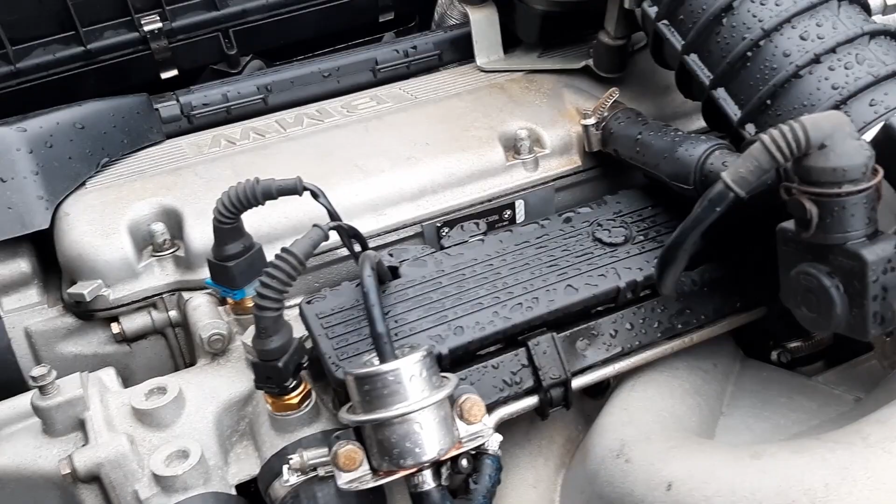Okay, so no more smoke. I went for another drive. I drove it harder this time, and I think most of the oil burned off now. So that's really good. I'm really happy. I thought it would be an exhaust leak, so yeah, I did not want to go back and redo this job. So yeah, looks like it's resolved.

Okay, so we're a few days later, and I can confirm that the drive shaft is definitely fixed. When I drive pretty fast with the throttle and I let go suddenly, there's no more thumping. So it's completely linear, it's smooth, and there's no issue. So I'm really happy about that, and it's something that I recommend everyone do on their E32s because it really smooths the drivetrain.

One other thing, if you've never changed the engine mounts on your car and the transmission mounts, I recommend just doing everything at once. Change your engine mounts, transmission mounts, and the drive shaft center bearing all at once, because then you only have to drop the exhaust once, and you can do it all at the same time, because you need to remove the transmission bracket anyway to remove the drive shaft. So you might as well change the mounts, and the engine mounts are not really complicated either. You just need to hold the engine from below.

So yeah, I recommend doing all three at once so you stabilize the drivetrain and make sure that your components are lined up correctly. So yeah, definitely a job I recommend, and not too bad and not too difficult, although dropping the exhaust and the drive shaft on the floor in the garage is not the most fun I've had. I have to be honest, but of course, it would be better if you have access to a lift. But other than that, it's not too bad.